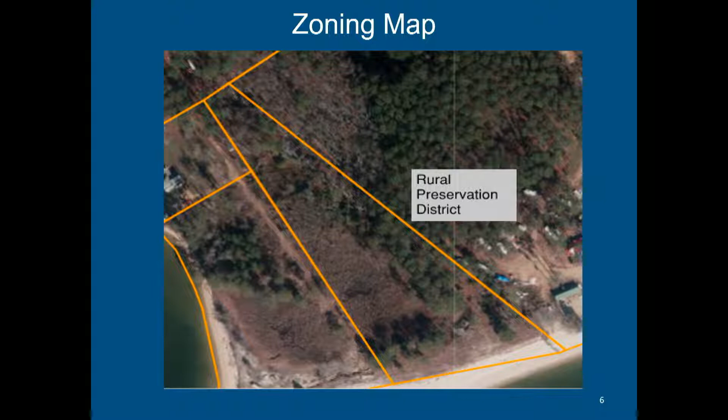The property is located at 15977 Camp Merryelands Road in Piney Point. It is zoned Rural Preservation District, or RPD. The applicant has proposed to remove the existing house.

All the wetlands located on site have been confirmed by MDE to be non-tidal. Additionally, there are no tidal wetlands encroachment in the rear of the lot, right along here, thus setting the 100-foot critical area buffer 100 feet from mean high water.

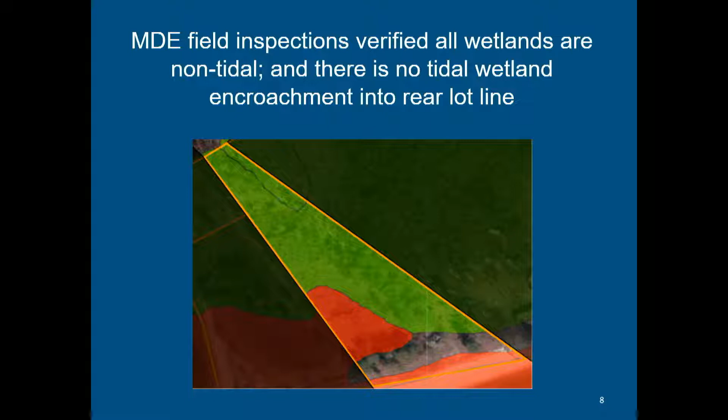The applicant is proposing a new two-story house over a carport and storage area. The Critical Area Commission, the Maryland Department of the Environment, Soil Conservation District, METCOM, and Stormwater Management have approved the site plan.

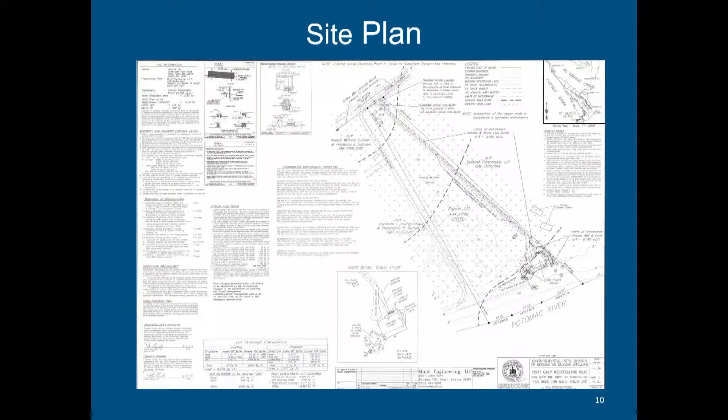And here we have the site plan and the detail. The applicant is proposing to construct a two-story house over a carport and storage area. The proposed house and the addition to the driveway impact the non-tidal wetland buffer. This is the 25-foot non-tidal wetland buffer, and all the non-tidal wetlands are located back through here. Once there's an expansion to the buffer for hydric soils, all the development will then be included in the wetland buffer.

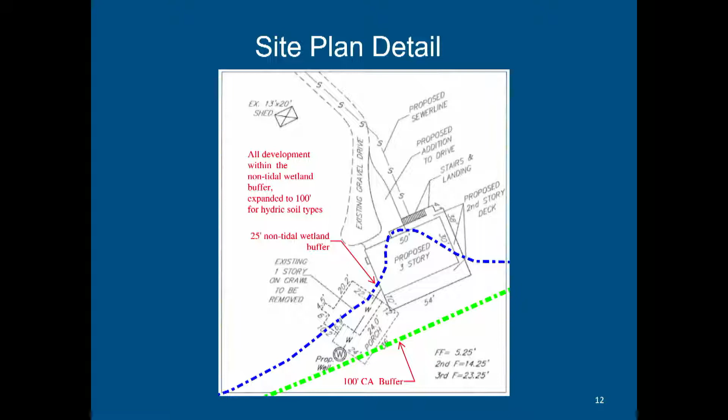Okay, do we have any questions? You said the Critical Area Commission did not make a comment, or did they make one? No, sir, no comment whatsoever. All right, thank you.

Any other questions from board members at this time? No, sir. Okay, who's speaking?

I would also like to add, I saw Pat Mudd's name up on the Zoom screen, but I don't see him now, and I wonder if he needs to be sworn in for testimony. He's on there now. There he is. We can swear them both in. Very good. Mr. Mudd, would you like to raise your right hand?

Do you declare and affirm under penalty of perjury that the testimony, responses, and statements you may give will be the whole truth and nothing but the truth? I do.

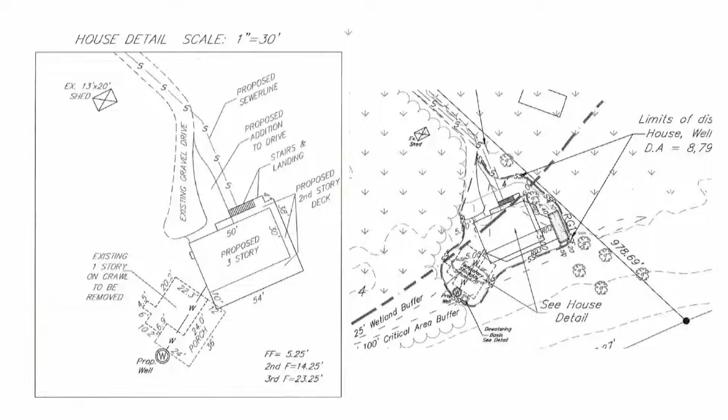Also of note, we do not want to use the existing footprint of the house. It's hard to see in this picture, but it pretty much sits right on top of non-tidal wetlands and the critical area buffers, so we're trying to move as far as we can away from both of those constraints. Next slide, please. Thank you.

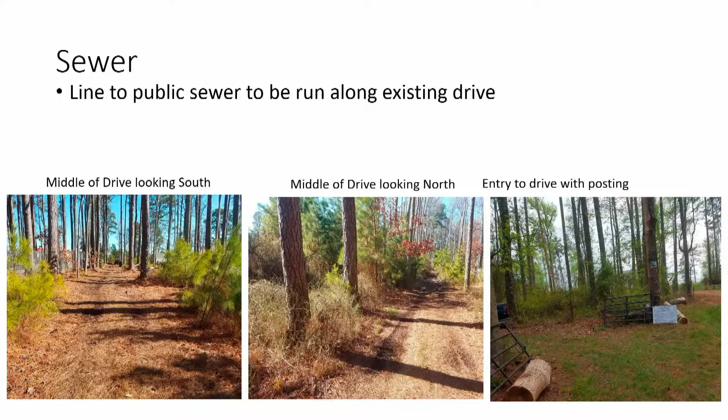Moving on to the site plan. The next two slides show the plan in its entirety. It's a little too small to read here, but what I wanted to point out is that the sediment and erosion control plans have been approved. For rainwater control, we will be using a gutter system and rain garden. As stated before, almost the entirety of the lot, except for where the current and proposed structures sit, is non-tidal wetland.

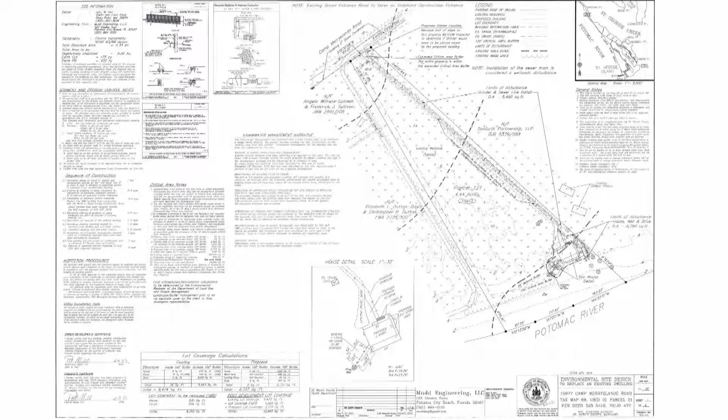Next slide. I don't have anything to point out on this slide. Next slide, please. This is the last one.

What is the square footage of the footprint? The existing house is about 1,000 feet. If you need exact numbers, I don't have them, but the existing structure is about 1,000 feet, and the proposed structure is about 1,500 feet plus deck. Thank you.

Any other questions? In that case, I will open it up to public testimony. Is there anybody in the audience who would like to speak for or against the project? And are we doing phones? No, sir. No phones.

I'll close the meeting to public testimony and ask the board for any discussion on the project. I have no problem with it. I like it. Everything's fine, getting MDE approval was a big step. Yes, sir. And, good luck.

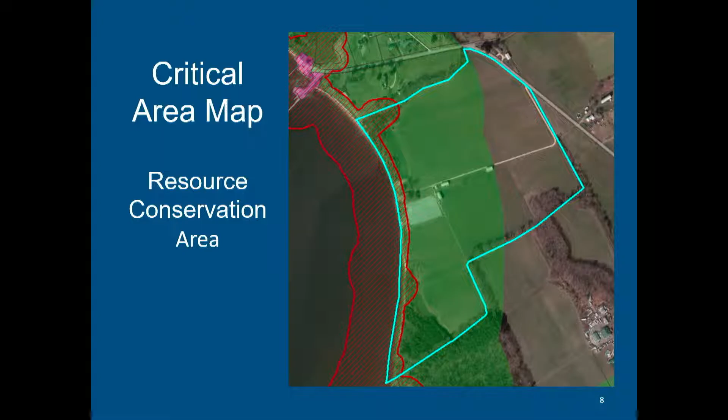The critical area buffer is set 100 feet from the mean high water line of the tidal waters of the Wicomico River. The property is impacted by hydric soils, and thus the critical area buffer would be expanded to 300 feet, which would encompass the whole property, or up to 300 feet.

The applicant is proposing to build within the 100-foot critical area buffer a 144 square foot living room addition over the existing deck, and removing the remaining 64 square feet of the deck.

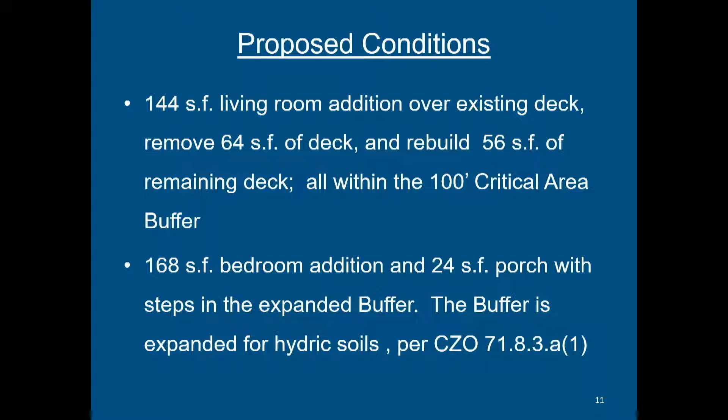In the expanded buffer, they're proposing a 168 square foot bedroom addition and a 24 square foot porch addition. The permit has been approved for stormwater management and soil conservation district due to less than 5,000 square feet of soil disturbance, and the Critical Area Commission asked for buffer mitigation if the board grants the variance.

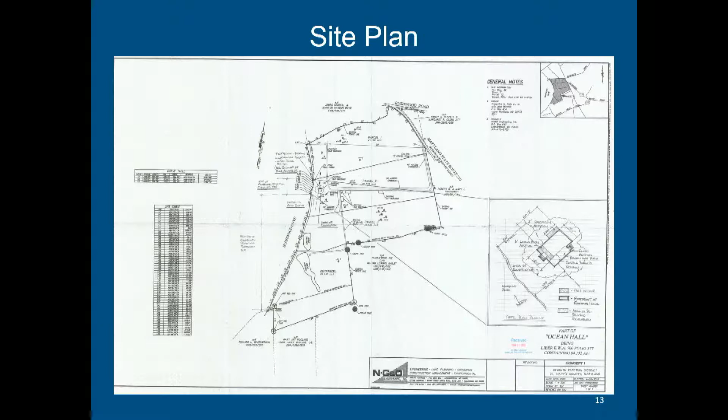We have the site plan, and the site plan detail depicts the applicant's proposal of the living room, the bedroom addition, and the rear porch entry.

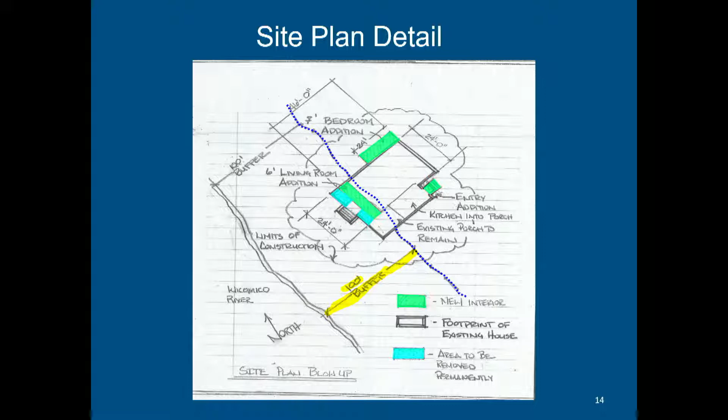The mitigation for this proposed project would be 4,544 square feet, which would include mitigation for permanent and temporary disturbance to the buffer. A minor buffer management plan for on-site plantings in the buffer must be approved prior to the issuance of a building permit.

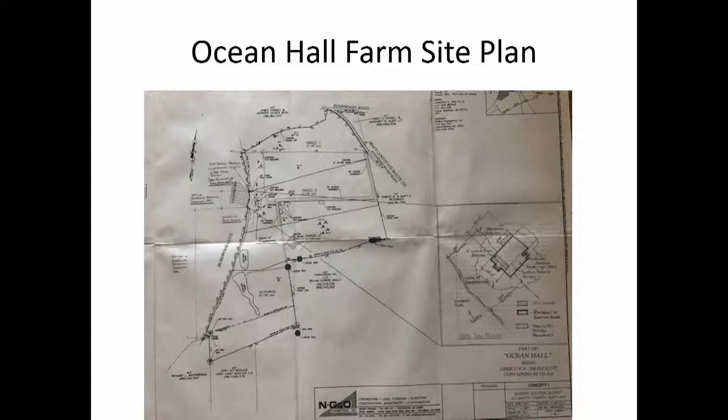Also worth noting, along the water in the bottom left there are two ponds on this plan, but today only the long pond still exists. The other pond, due to erosion along the waterfront, is no longer there. That's why I'm going to go through a series of slides showing what the family has been doing - shoreline protection along the entire waterfront from the house to the end of the property, which is already completed. The next slide will show that.

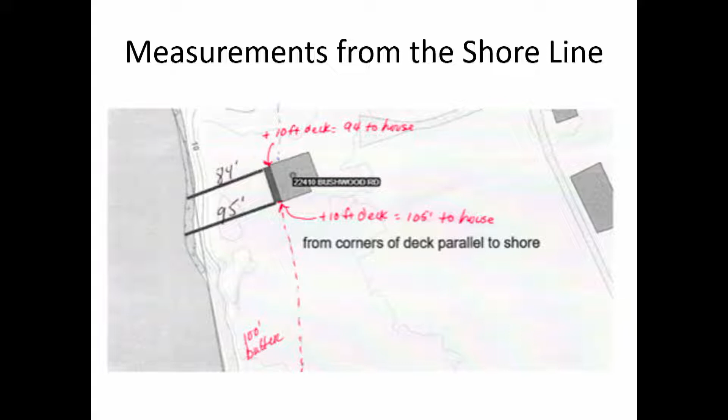The reason we're here today is because the existing house at the end of the long driveway falls within the 100-foot critical area buffer. You can see at the bottom the deck is in, and on top the front corner of the house is also in, just because of the way the water line parallels through the house. We'll get into the plan for what we're going to do, but I wanted you to see roughly why we're in the critical area - it's an existing house and it is where it is.

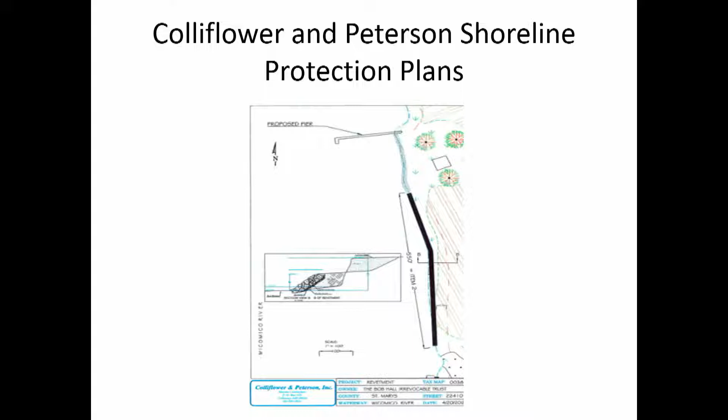So there's a break. The next slide shows a blow up of where the house is and the shoreline protection already there, and below that is the section we just talked about.

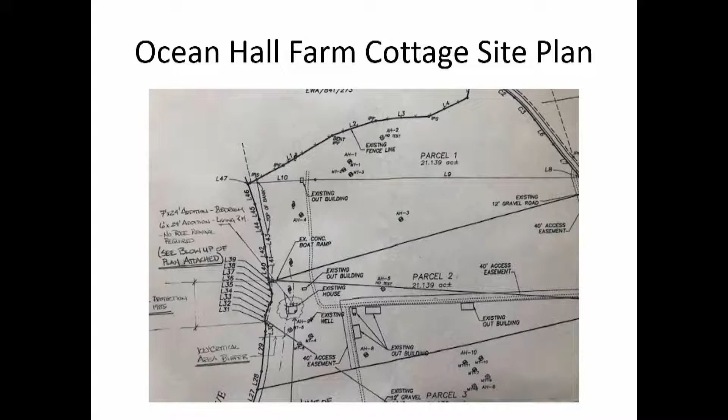So this gets into what Stacy had nicely colored in her presentation. I'll point out the footprint of the existing house, the double blue line. It's a 24-foot wide by 40-foot original structure with a 10-foot deck out front, a set of steps on the deck toward the water, a lean-to porch off the 24 by 40 structure toward the strawberry field, and a screen porch on the front bottom corner as shown in the plan.

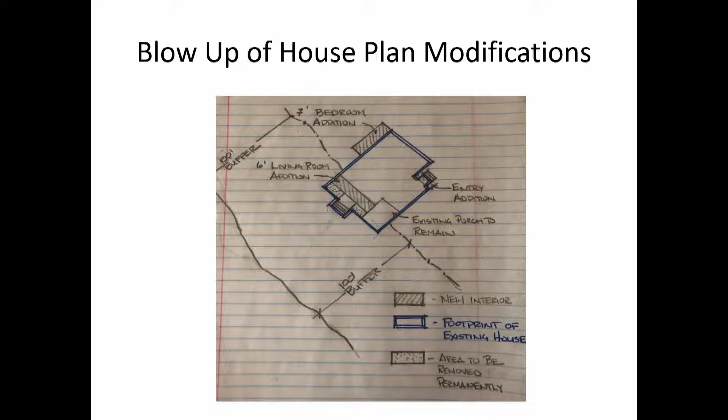So those are the new areas. And then there are the two areas Stacy mentioned on both sides of the stairway going up to the new living area, part of the deck that I don't think really serve any purpose going forward. I would propose we just have a stairway up to a landing going into the front of the house, and that area go away. So that's the extent of what we're proposing to do and how it impacts our critical area.